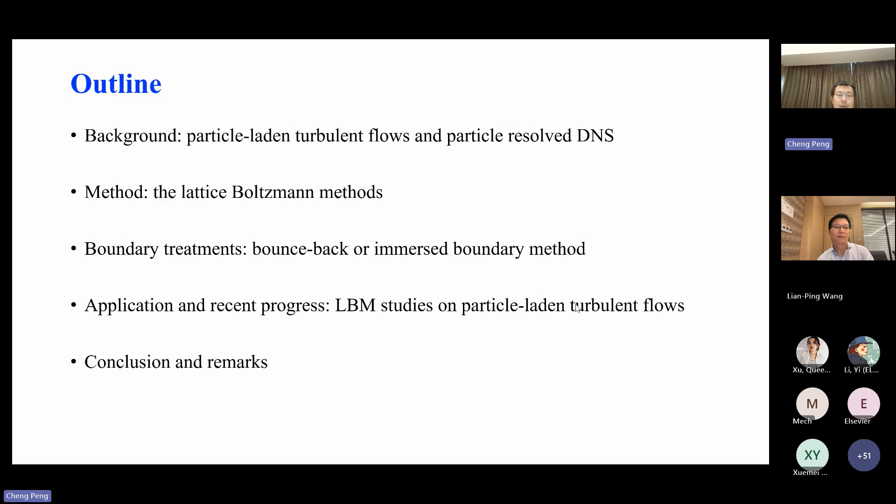Then I will show you some recent progress on how we apply this method to study particle-laden turbulent flow, and finally give some conclusions and take-home messages.

So what are particle-laden turbulent flows? They are multi-phase flows consisting of a continuous phase, usually fluid, and a dispersed phase, which could be particles, droplets, or bubbles, if the droplets and bubbles are sufficiently small and cannot deform. They can be found in many natural phenomena such as sandstorms, volcano eruptions, and sediment transport in riverbeds, and also in many engineering applications.

For example, in this animation, I show a fluidized bed containing a lot of particles.

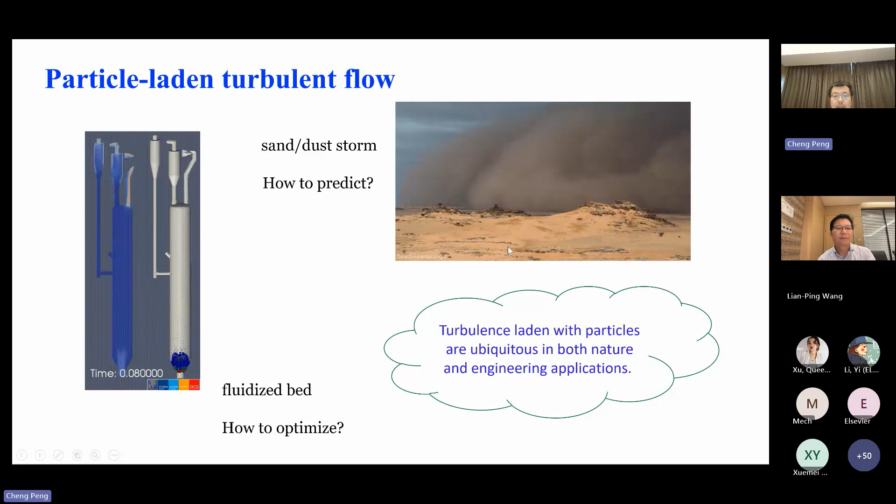So that's a basic definition of particle-laden flow, and why we want to study it, and what are the essential questions we want to answer.

There are two essential questions. The first is how does turbulence affect the particle motion? For example, in this movie on the left, this is a particle moving in the cyclone. If we want to know where the particle will go, we need to know the force acting on this particle in the turbulent environment.

This usually comes from the equation of particle motion. But for more general scenarios, how we should refine this equation of motion is still a quite open question to answer.

We're also interested in how turbulence affects the group effect of particles, for example the collision rate and the preferential concentration. This is a quite important topic for some applications like chemical engineering.

We also want to know how particles modify turbulent flow properties. For example, in this figure, you see a fireman holding a water hose. The pressure difference between the inlet and outlet of this hose is usually fixed, so if we can reduce the wall stress in this hose, the water can go further, and in this case, can save more lives.

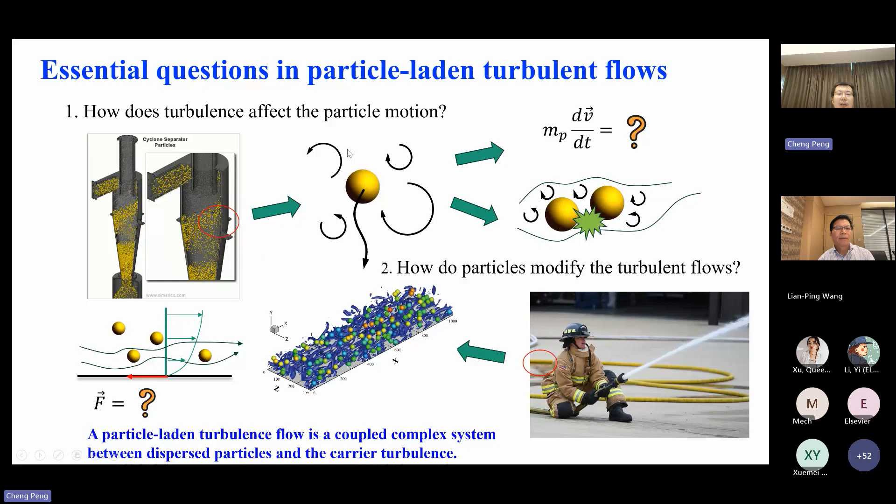Unfortunately, in many applications these two questions are coupled together, meaning if the turbulence is modified by the particles, it will have a feedback effect on the particle motion. So these two questions are usually coupled, which makes particle-laden turbulent flow study quite complicated.

So how do we study this complex particle-laden turbulent flow? Back in the 1980s, many scholars had done quite some beautiful theoretical work, but nowadays I think particle-laden turbulent flows are too complicated to do pure theoretical analysis.

So normally, as with other fluid dynamics problems, we can start with experiments or simulations. Of course, you can always argue about the advantages and disadvantages of these two methods.

For experiments, if you do it carefully, it's physically reliable - at least most people will believe so. And it can apply to realistic physical conditions, meaning you can have quite complex geometry. But it's also relatively expensive to conduct.

For particle-laden turbulent flow nowadays, the most commonly used experimental setup is PIV. But I think the resolution of the PIV system is a little bit tricky to resolve the disturbed flow around the particles, and it's also kind of restricted to realistic conditions.

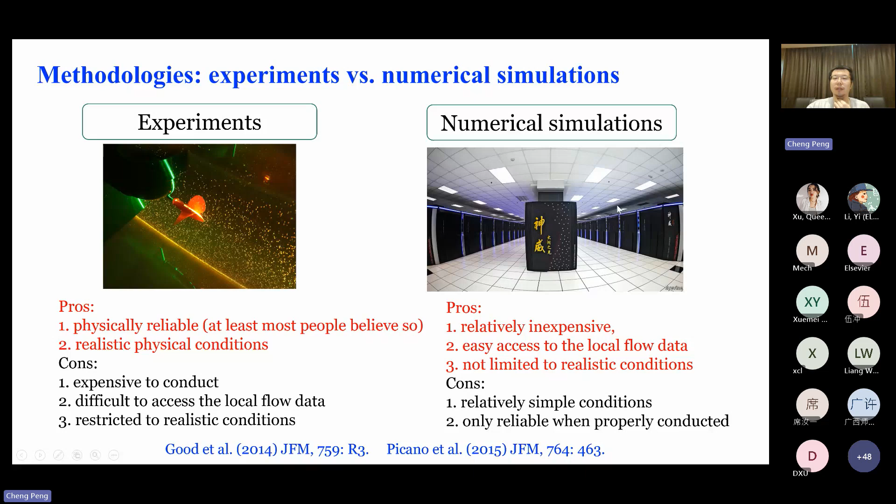I think one of the biggest advantages of doing numerical simulations compared to experiments is that we can actually resolve everything around the particle if the grid resolution is sufficient. Then it gives us a lot of information to model the problem and reveal the mechanisms.

So if we choose to do our problems with numerical methods, what numerical method should we use? It depends on the problem. One principle is that there is no universally good numerical method - the good numerical method depends on the problem you are targeting.

There are basically three non-dimensional parameters that would determine what numerical method you use. The first one is the volume fraction. The second one is the Stokes number, which determines the inertia of the particle, like how tightly a particle follows the fluid motion. The third one is the particle size.

So if the particle inertia and particle size are both small, the particle will follow the fluid tightly, so you don't have to track the particle motion - you can get the particle velocity from the fluid information.

But if the particle inertia becomes larger, it will no longer follow the fluid tightly. Then you need to solve the particle motion separately.

There are two methods. The first is, if you are dealing with dense particle motion, you can assume the particle phase as another fluid phase and solve the Navier-Stokes equation. This method is the two-fluid method. But I think this method lacks solid background because physically it's very difficult to develop a Lagrangian, or Eulerian, description of the particle motion.

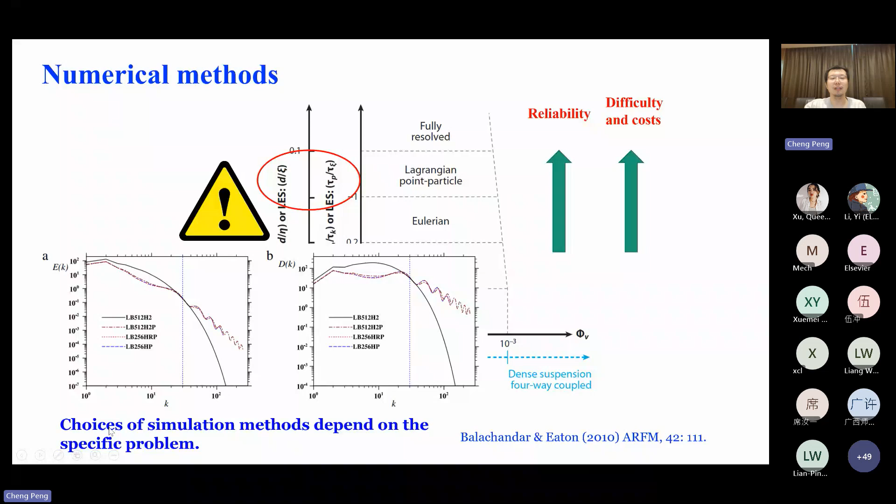But this equation only applies rigorously when the Reynolds number is infinitely small. So for the finite Reynolds number case, how should we refine it? The information could come from our fully resolved DNS.

The other thing is that a lot of particle effects on turbulence actually happen in the disturbed flow around the particle. So it's critical to resolve the disturbed flow around the particle. I show some figures here.

For example, it is well known that particles will enhance the dissipation rate of turbulent kinetic energy in turbulence. This can be directly seen from our fully resolved DNS, that the dissipation rate around the particles has been enhanced. So in many cases, if we want to better understand the interaction between the particles and the turbulence, fully resolved DNS is the only way out.

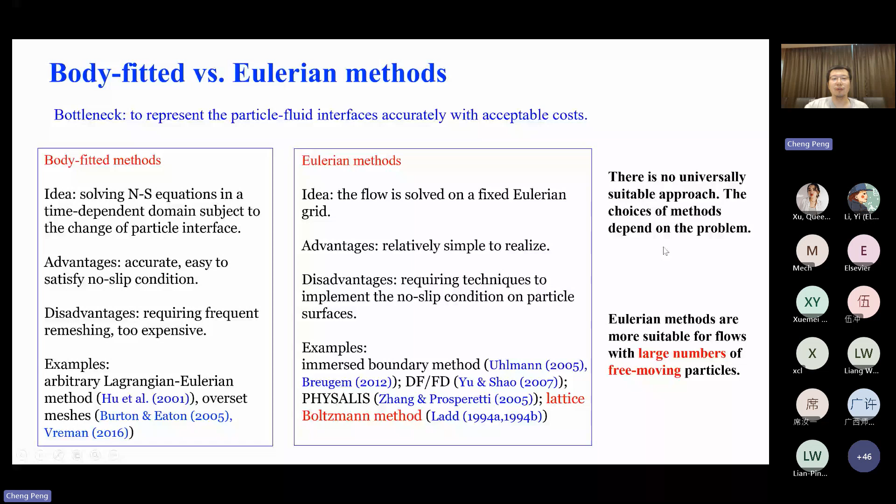So then I will give a brief introduction of the lattice-Boltzmann method, why we use this, and why we think it's a very good method to solve particle-laden turbulent flow problems.

It contains a lot of components, and many of you will know that every ingredient in the Navier-Stokes equation, for example the unsteady term, the pressure gradient, the nonlinear advection, and the diffusion terms, are all contained in the expansion of F.

So by taking the moments, meaning we sum up this F multiplied by the constant discrete velocity E to some extent, typically the zeroth and first order moments, we can see that we get directly the continuity equation and the momentum equation. If we make the equivalence between these moments of F and the hydrodynamic quantities in the Navier-Stokes equation, then we basically recover rigorously the Navier-Stokes equation.

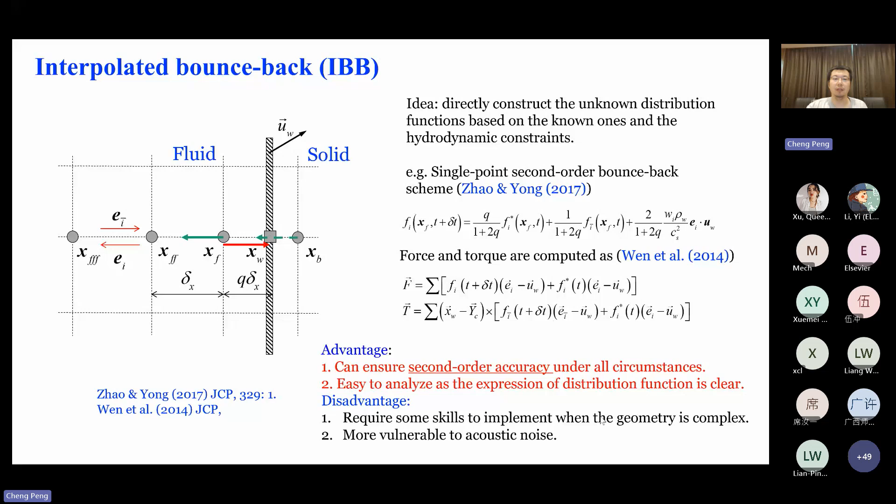Because when you use interpolated bounce back, usually you don't have the fluid information inside the particle. So if the particle moves and uncovers a new fluid node, you have to initialize the distribution function on this newly uncovered fluid node. Here I give an example of our newly developed purely local construction on this node.

We usually refer to this process as refilling, and if this refilling or initialization of distribution functions on these new fluid nodes is done inappropriately, it will give you very severe acoustic noise, and it usually will kill the simulation, making it unstable.

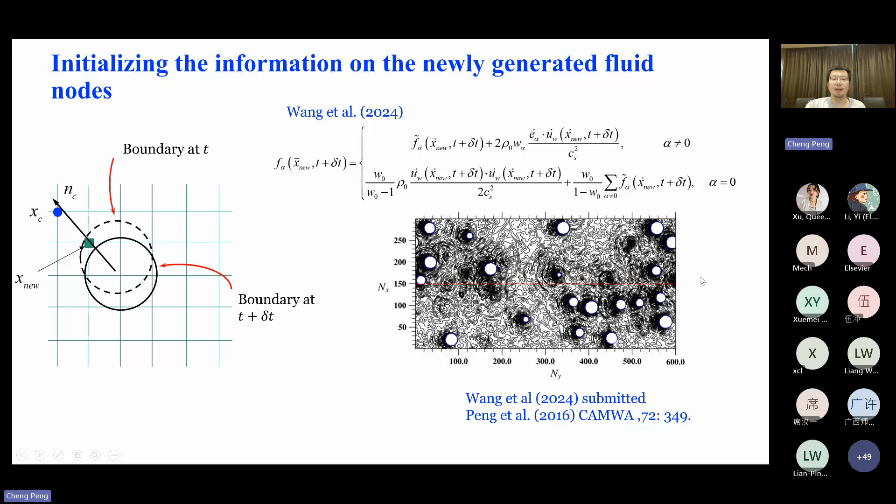Another big category of boundary treatment that many people use with LBM to solve particle-laden turbulent flow is the immersed boundary method. In the LBM world, the immersed boundary is nothing different from the immersed boundary in conventional CFD. I think the most commonly used immersed boundary for particle-laden flow is the direct forcing immersed boundary developed by Uhlmann, or modified from this.

This immersed boundary has essentially 5 steps. Basically, you solve the Navier-Stokes equation without the body force, then interpolate the unforced velocity onto the Eulerian grid. Immersed boundary needs two sets of grids: one Eulerian grid for the fluid phase and a Lagrangian grid attached to the particle. Then you interpolate this unforced velocity to the Lagrangian grid.

Then you calculate the body force based on the difference between this interpolated velocity and the desired velocity, which satisfies the no-slip condition. Then you distribute this force back to the Eulerian grid, and correct the velocity at the Eulerian grid. This is very easy to implement when the geometry is complex, because you have a Lagrangian point attached to the solid body.

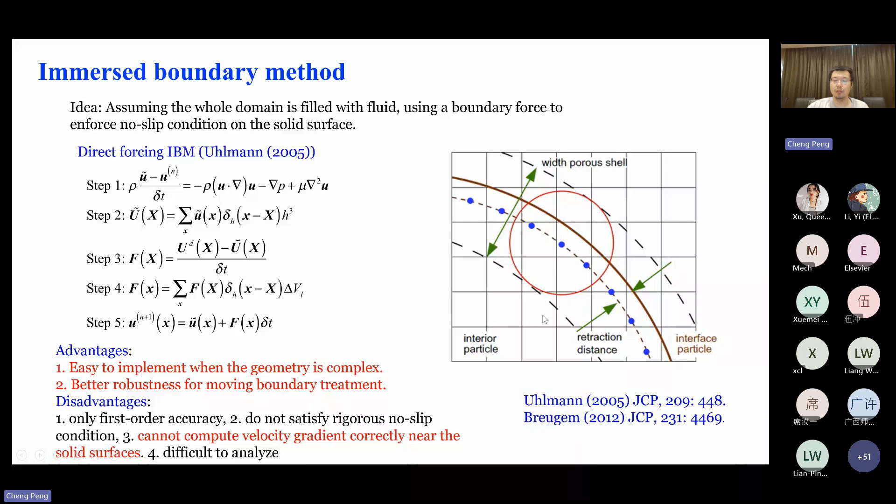You might have heard that in some papers, people claim that the immersed boundary has second order accuracy. But one scholar I respect a lot says that one mathematical proof is worth more than 100 numerical simulations. So we can actually prove the immersed boundary only has first order accuracy by using a very simple problem.

This is a plane channel flow at steady state, and the analytic solution looks like this. You just integrate it twice and you get this. For this problem, the immersed boundary method can also be solved analytically.

By solving this, you directly see that the error of the velocity gradient is on the order of 1, and the error of the velocity is on the order of delta, or the grid spacing. We have also conducted a very complex systematic comparison between the IBB and IBM.

For example, this 2D case of a free settling cylinder shows that the interpolated bounce back will have more severe force fluctuations, and these fluctuations are due to a numerical problem. Because in the Eulerian method applied to a moving particle problem, the force depends on the location of the solid object relative to mesh lines. But this is not physical.

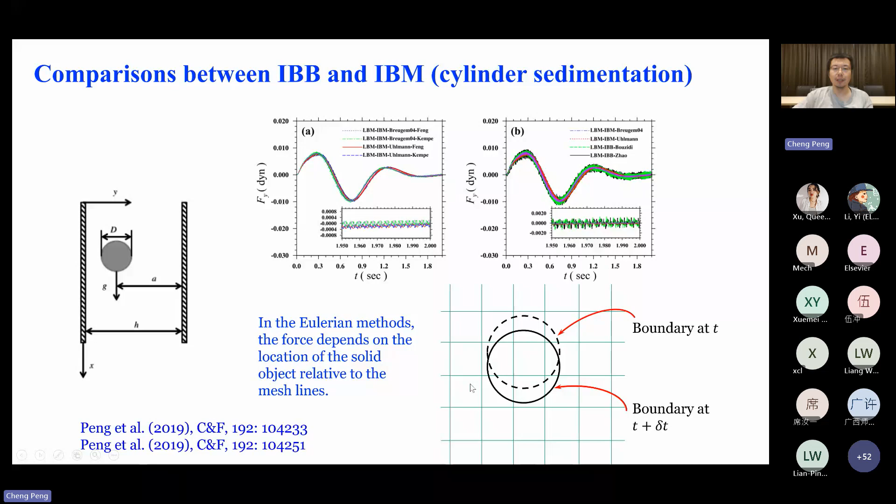The immersed boundary has less force fluctuation, so it has better robustness. We also extend this comparison directly to particle-laden turbulent flows. The overall decay of turbulent kinetic energy and dissipation rate looks good for both methods. But if you look at the local profile, the immersed boundary will have some underestimated dissipation rate profile.

This is not physical, because from the Stokes solution you know that the dissipation rate will increase monotonically as it approaches the particle surface. So these results make us prefer to use the bounce back, interpolated bounce back based LBM for particle-laden turbulence studies.

Of course, there is another category in the LBM world for treating no-slip boundary conditions, called the immersed moving boundary method. This basically designs an additional collision operator to satisfy the boundary. We can apply our analysis and prove that this is just equivalent to the immersed boundary, but realized in the mesoscopic LBM world.

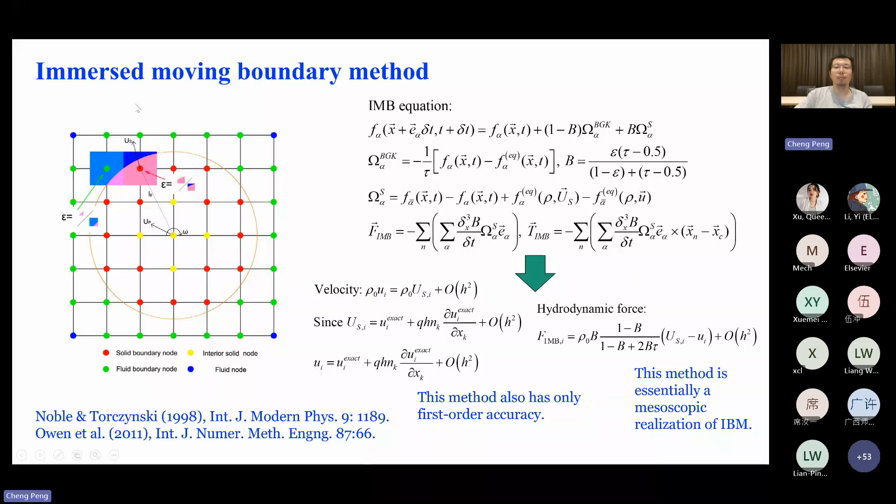It also only has first order accuracy. But because this scheme directly introduces the porosity into the equation, it will have some unique advantage when you apply this method to porous media flow, for example.

Although we don't use the immersed boundary method for our particle-laden turbulent flow, we have done some improvements for the immersed boundary method. For example, usually you need an iteration to enforce a precise no-slip boundary condition on the Lagrangian particle surface. But we can prove that in this ideal case, this iteration just creates a series of boundary forces.

The limit of this series will give you the precise no-slip boundary. By realizing that, you can just amplify this boundary force with a coefficient alpha, and alpha has an analytical value: 8/3 for the 4-point delta and 2 for the 3-point delta function. This has also been found in other people's work, for example, Tao's work.

Another thing we also tried to fix is the dissipation rate calculation of the immersed boundary. The previous solution is that because the velocity gradient outside the diffuse layer is correct, you can take two points and do extrapolation to get the correct velocity gradient within the boundary layer. But this extrapolation only works well when the distribution of the velocity gradient is linear or quasi-linear. For particle-laden flow, where the velocity gradient follows a Stokes solution, this extrapolation will not work.

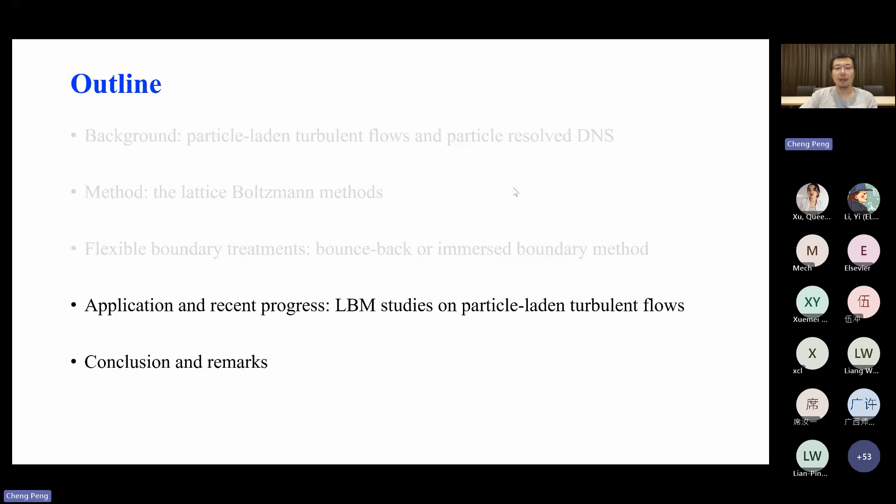In the last part, I'll show some progress on how we apply this method to particle-laden turbulent flows. The first case is decaying homogeneous isotropic turbulence, which is the simplest form of turbulence. We add particles in and ask: for single-phase decaying homogeneous isotropic turbulence, people have realized that once the turbulence is fully developed, the decay of turbulent kinetic energy follows a power rule.

Of course it's debatable, but many people have already studied this problem—for example, some big names here: Kolmogorov, Batchelor, Saffman, Carson. So our question is: once we have particles, will the decay of turbulent kinetic energy still follow a power rule, and if it does, how would this exponent change?

We did a lot of simulations, using our LBM code to generate over 300 data points. We confirmed that even with particles, the decay of turbulent kinetic energy will more or less follow a power law, and the relationship between the particle-laden exponent N and the single-phase N is determined by the mass loading and the density ratio. This is the scaling law we developed to predict N in the particle-laden world.

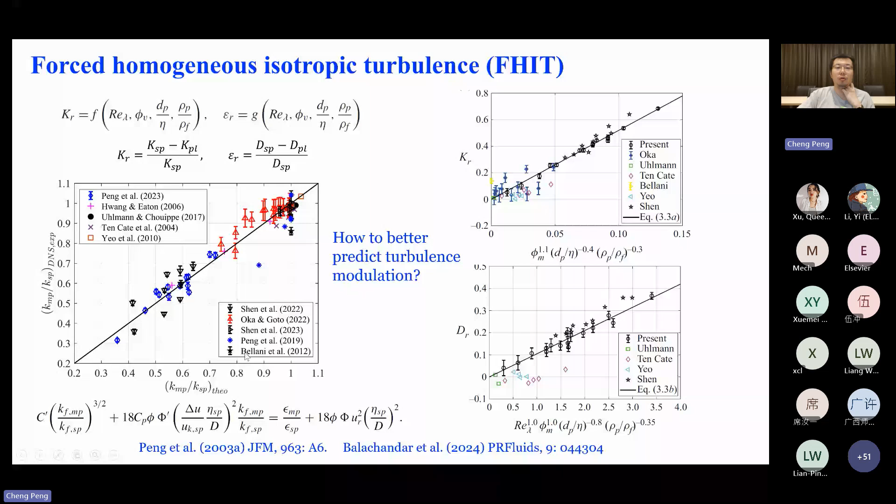We were also interested in how turbulence affects the particle, for example particle drag. In a laminar environment, many of you know the Schiller-Naumann correlation to predict particle drag, but in a turbulent environment, how would this CD change? This problem has been studied for many years, going back to the 1980s.

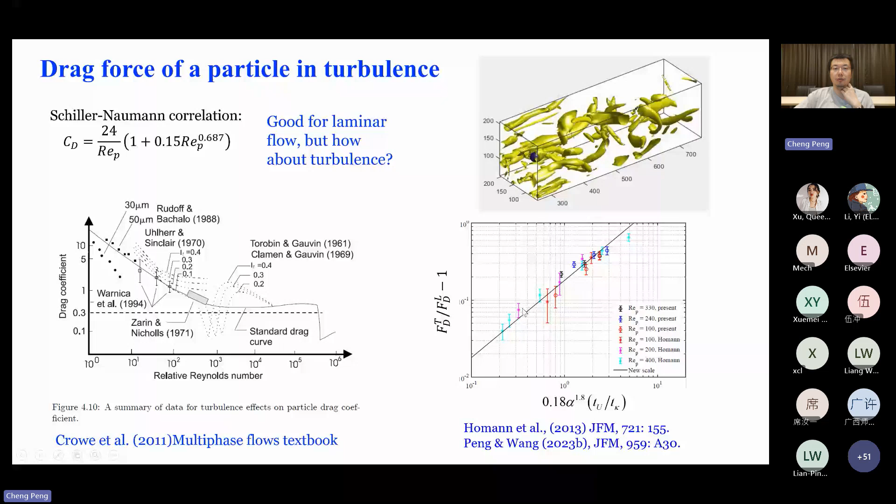This was first done by Homann, and we further considered the homogeneity in this turbulence, like we put another coefficient here. And recently, I applied this to study how turbulence affected the settling speed of particles.

This animation shows the particle trajectories under different turbulent intensity and density ratio conditions. In all cases, we found that turbulence will reduce the particle settling speed. This is consistent with some other previous studies by Luca Brandt's group.

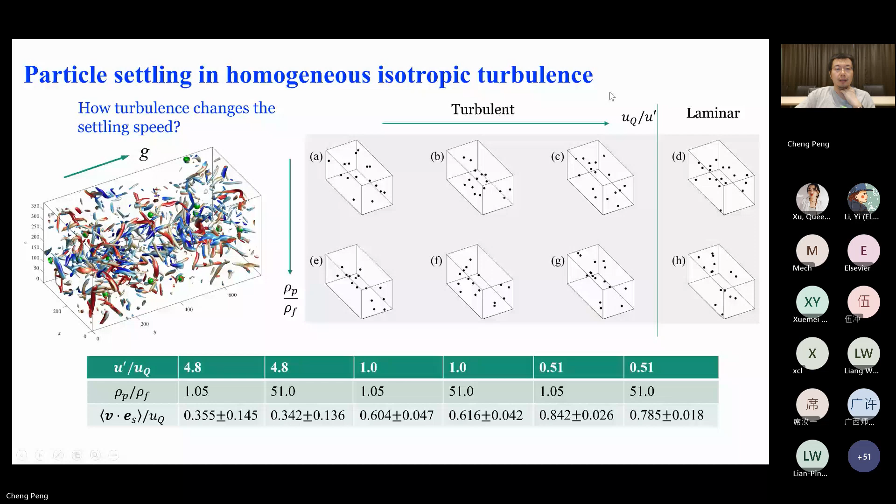We also extended this to homogeneous shear turbulence. This is the simplest form of shear turbulence. It's sustainable turbulence because you have shear, you have production of turbulent kinetic energy, but it's still homogeneous. The most important part here is how you implement the shear periodic boundary, or the Lees-Edwards boundary, with finite particles.

We figured out algorithms to implement it, and we successfully completed this simulation. Of course, we can use this code to do more deep physical analysis.

As you can see here, by adding particles, it basically breaks the large scale vortices and creates a lot of small vortices. Because small vortices are more isotropic, you can expect that the isotropy of the turbulent kinetic energy distribution will be enhanced by the presence of particles.

Also, in this case, because the particles do not follow the flow, they will disturb the flow and enhance the Reynolds stress, which essentially enhances the turbulence itself.

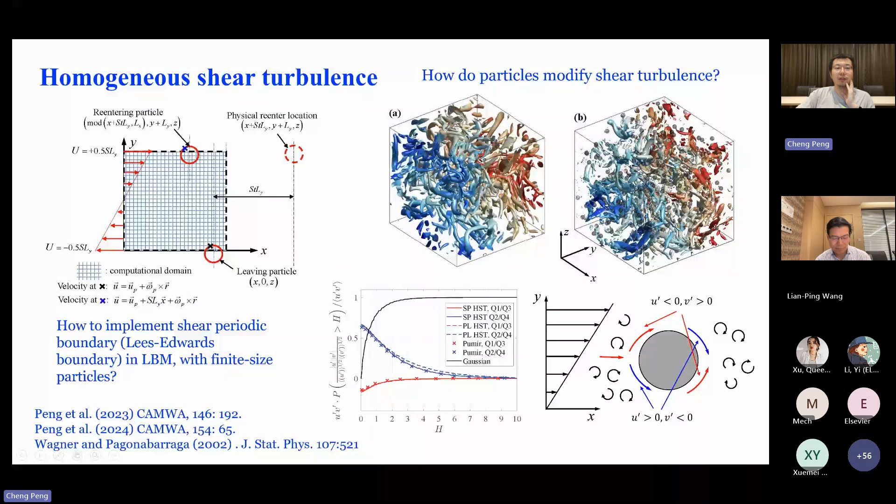Finally, we applied this to wall-bounded turbulence, for example, the particle-laden channel flow and pipe flow. Using the method of volume averaging, we can derive the turbulent budget, the kinetic energy budget equation for the two-phase flow, and we can use our data to examine every term in this budget equation.

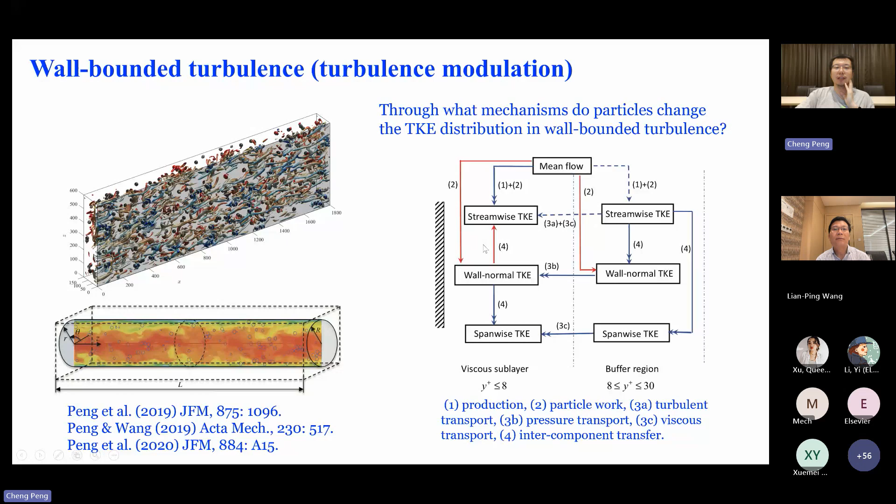We found that particles have enhanced some mechanisms, reduced or suppressed others, and even created some new paths for the turbulent kinetic energy motion. So this gives us a better understanding of how particles modify turbulence.

And finally, this is the final case. We recently did some work trying to find an explanation, because this near wall turbulence is dominated by quasi-streamwise vortices, and under these quasi-streamwise vortices, particles will find their preferential locations to settle.

Previously, people found that particles will preferentially locate in the low speed regions, but some other cases found they locate in the high speed regions. For the latter case, the mechanism has not been very clear.

So we did very careful simulations to seek a reason for this, and we realized that the reason for particles to accumulate in the high speed streaks is because once these particles enter the near wall region, they will be ejected away from it.

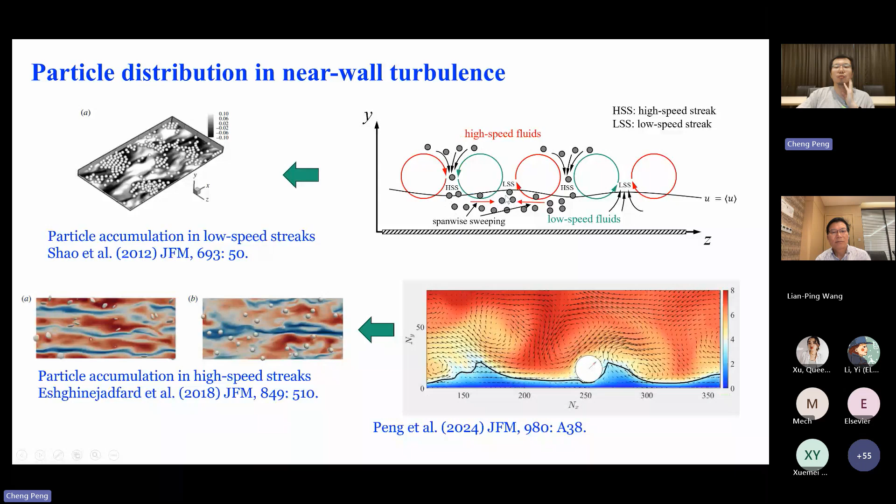So it's basically high speed region in, high speed region out. There is no chance for them to move to the low speed region. But if you have sediment particles, then the particles will stay longer in the near wall region, and it will finally be swept to the low speed regions. We used this to reveal this mechanism.

Finally, a brief summary. First, there is no universally good numerical method. So if LBM is not a good method for your problem, don't criticize LBM, just choose another method which is more suitable for your problem.

But for our problem, which is particle-laden turbulent flow, we think LBM is a very suitable method because of the features introduced before. We developed interpolated bounce-back based LBM to conduct fully resolved simulation for particle-laden turbulent flows. I think this is quite unique because most groups in the world use immersed boundary based LBM.

The accuracy, numerical stability and computational efficiency of our method have been carefully validated. Comparing to the alternative method, this method preserves the second order accuracy in boundary treatment and ensures the correct local dissipation rate computation, which is important for our applications. We have successfully applied this method to study different kinds of particle-laden turbulent flows, for example, homogeneous isotropic turbulence, wall-bounded turbulence, homogeneous shear turbulence, and it provides deeper ways to understand particle-turbulent interactions.

Of course, there are still many open questions to be answered, particularly how we could use the data generated from our fully resolved simulations to do the modeling for more industrial problems.

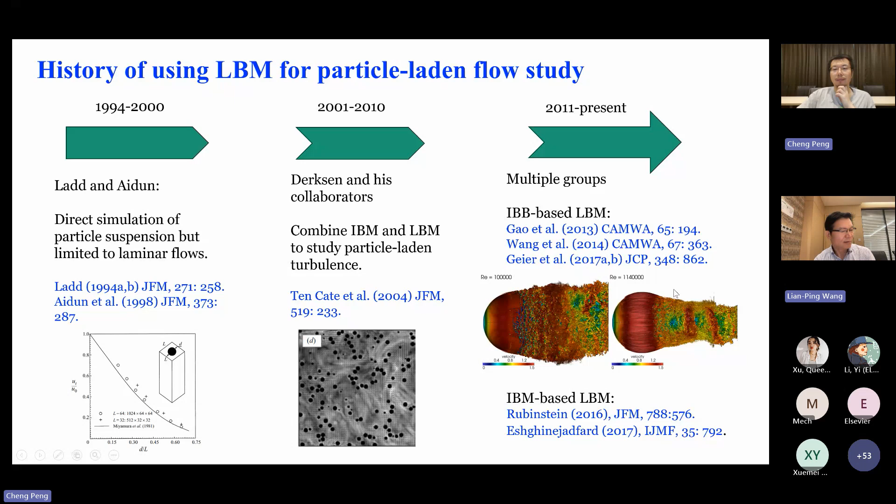If you talk about computational resources for our particle-laden turbulent flow, we usually need a computational grid like, for example, for this case we use 512 cubed, which is like 0.1 billion grid nodes.

For LBM this is more expensive because at one grid point you have like 27 distribution functions to store. So you need a lot of memory to do this.

Of course, if you apply some techniques, for example adaptive grid refinement, you can reduce the computational resources. So this is very expensive, I would say, but as long as your code has been optimized, it can be relatively quick.

As you can see, although we are solving more equations, these comparisons show that our overall computation speed is comparable to the conventional methods. So I hope I answered your question.

Okay, thank you. Let me ask one quick question. How would you compare particle-resolved simulation with point particle simulation? What are the main advantages of particle-resolved simulation? What more information can you get?

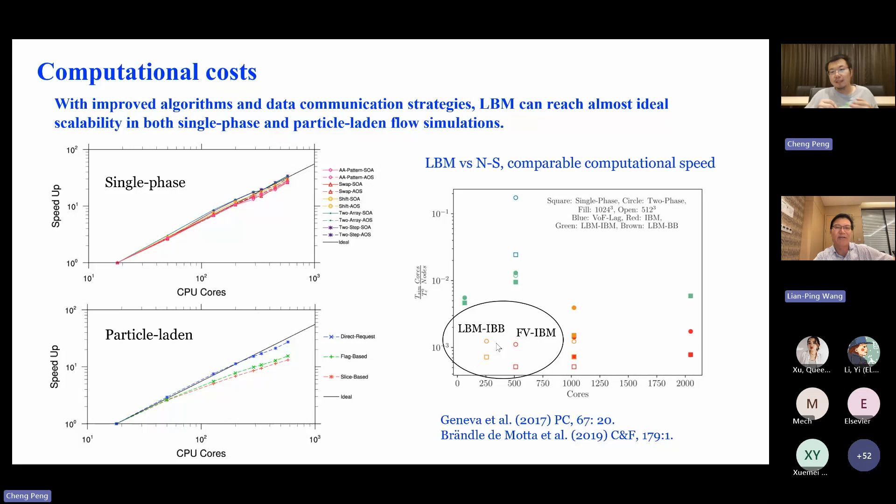So in terms of particle dynamics, the fully resolved method, directly calculating the force acting on the particle, will be more accurate. Another thing is, if you talk about the particle's effect on the turbulence, for point particle simulation you don't resolve the disturbed flow.

For example, usually you just add a feedback force, doing interpolations to the grid point, and this is not physical I think. Numerically it may be good, but it's not physical.

But in the fully resolved method, you can directly see the disturbed flow rigorously simulated. It satisfies the Navier-Stokes equation. So I think these are two aspects.

Of course, some people—I know there's one paper in my mind done by Pedro Costa from TU Delft, I think—they directly used fully resolved DNS for point particle, meaning the particle size is much smaller than the Kolmogorov length.